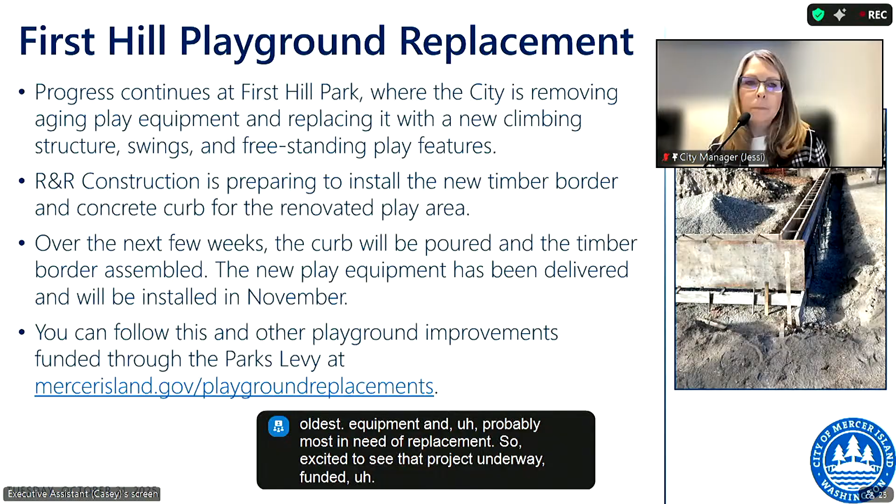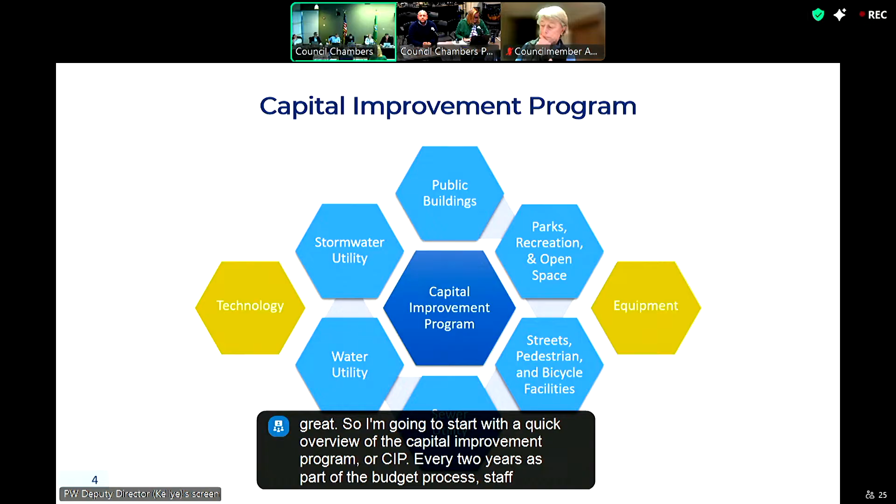Okay, great. I'm going to start with a quick overview of the Capital Improvement Program, our CIP. Every 2 years, as part of the budget process, staff develop a 6-year plan that lays out how we'll maintain, improve, and invest in public infrastructure, things like buildings, utilities, parks, streets, and technology. Each new CIP cycle begins in the spring of even-numbered years and concludes with the adoption of the biennial budget later that same year. It's a big, collaborative effort that helps us plan ahead and make smart, strategic investments across the city.

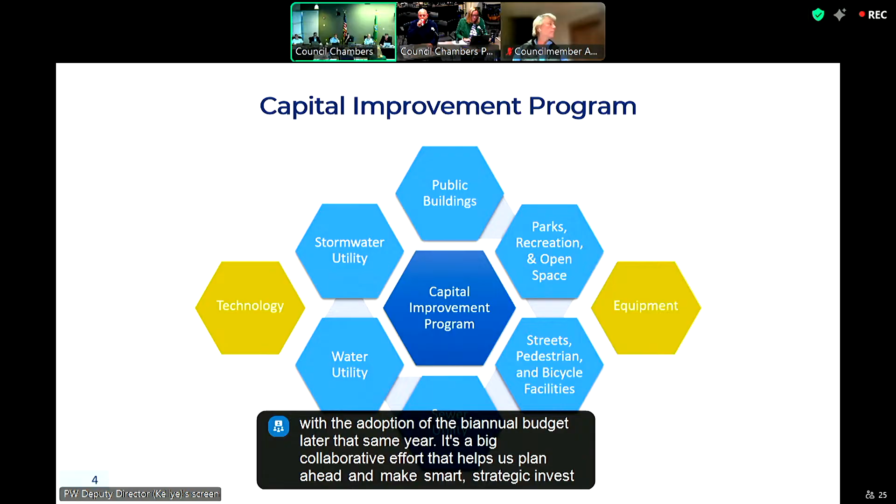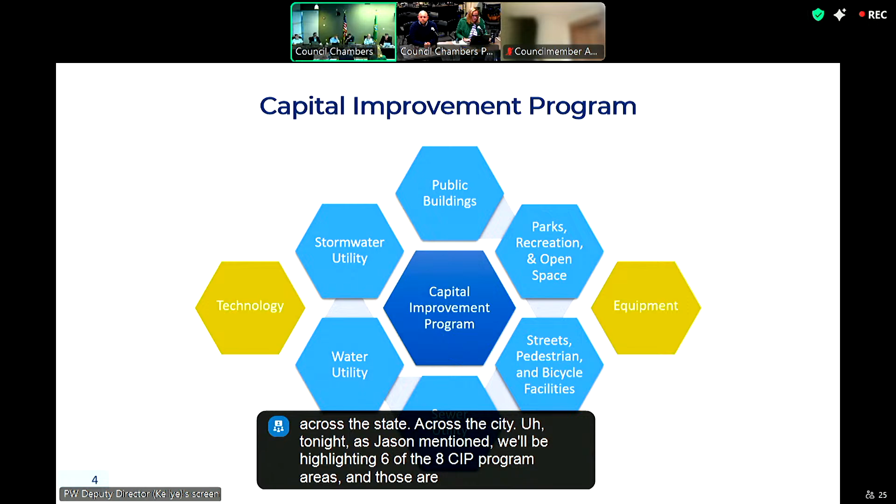Tonight, as Jason mentioned, we'll be highlighting 6 of the 8 CIP program areas, shown here in blue. For this biennium, the city CIP totals about $105.5 million. Most of that funding supports our public buildings, parks, streets, and utility programs, the areas where we continue to see the greatest community need in infrastructure investment.

Altogether, the 25-26 CIP includes 148 active projects. Of those, 137 are managed by the Public Works Department. Projects span all areas of city infrastructure, with the most in the water utility and parks, each with 29 projects. We also have 25 street projects, 20 public building projects, 18 in the sewer utility, and 16 in the stormwater utility. It's a substantial workload for our 20 staff members who manage everything from planning and design to construction and maintenance.

And finally, none of this happens without the team. We've got a talented group of engineers, landscape architects, project managers, inspectors, and management staff working behind the scenes to keep projects moving and on track. Their combined experience and collaboration are what makes it possible to deliver such a large and diverse program. Most of our team members are here tonight and available to answer any questions you might have on their specific projects. We really appreciate the opportunity to share their work and highlight the progress happening across the city with you and the community.

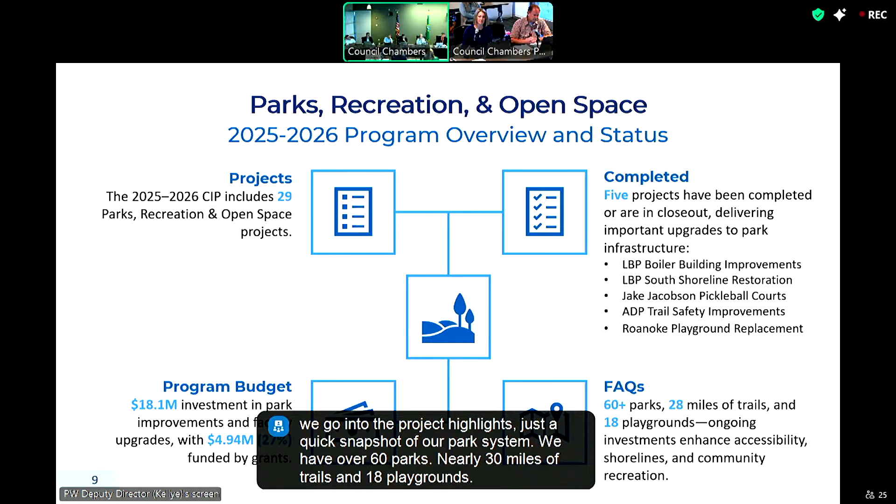Next slide, please. So kicking things off with our completed projects at Luther Burbank with the boiler building. Some of you joined us for a site tour last week where you saw key improvements including the seismic upgrades, chimney height reduction and stabilization, a new roof and chimney cap, and then renovations to our restroom and concession area. Construction wrapped up in early 2025 with final closeout underway and expected to wrap up by year end.

This project was supported by nearly $778,000 in Washington State grant funding. And these improvements actually set the stage for Phase 2, which will focus on activating the building for public use and providing a hub for community and recreation programming.

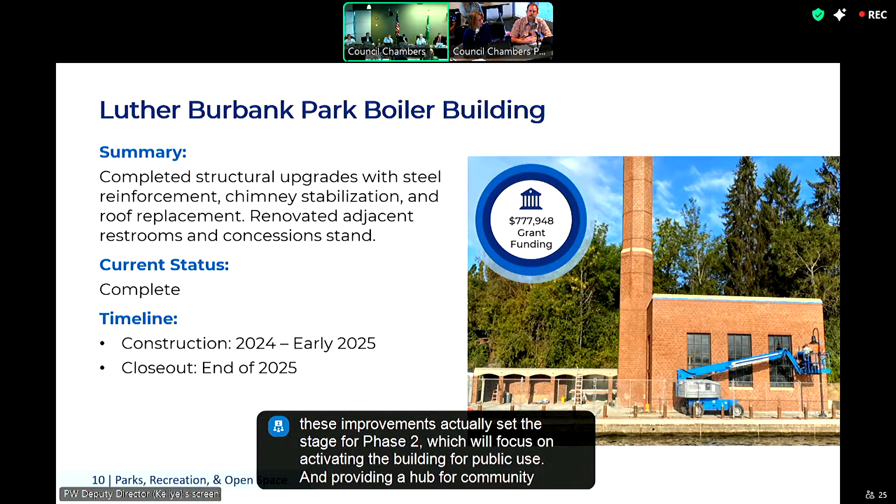Next slide, please. Now, the South Shoreline project focused on restoring and protecting the area between the docks and the swim beach, boosting aquatic habitat and stabilizing our shoreline at Luther. Key improvements included adding fish habitat gravel and the large woody debris, relocating and upgrading trails, removing invasive species, and planting native riparian vegetation. Construction wrapped up this summer, and final closeout is also underway and should be completed by year end.

A fun fact for the South Shoreline project is that the invasive plant removal and the shoreline planting was actually completed by volunteers and the Conservation Corps crews. This included 87 volunteers joining us across 3 events in 2023, showing that this is truly a community-driven restoration event. This project was also supported by $240,000 in grant funding from King County.

Next slide. And then to round out the 3 completed projects at Luther Burbank this year, the former tennis courts have been transformed into the Jake Jacobson pickleball courts, named in honor of Councilmember Jacobson's dedicated service to our community. This project replaced the aging 1970s tennis courts with 8 brand new pickleball courts, had new surfacing, striping, nets and fencing, accessibility and drainage improvements, and we restored the Summer in the Wetlands mural that you can see in the back of the image. Most construction took place in 2024 with final coatings applied this past June.

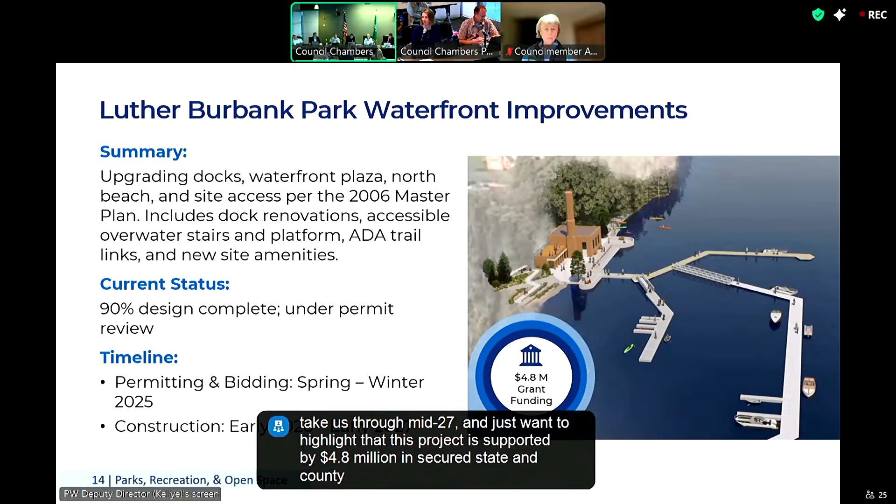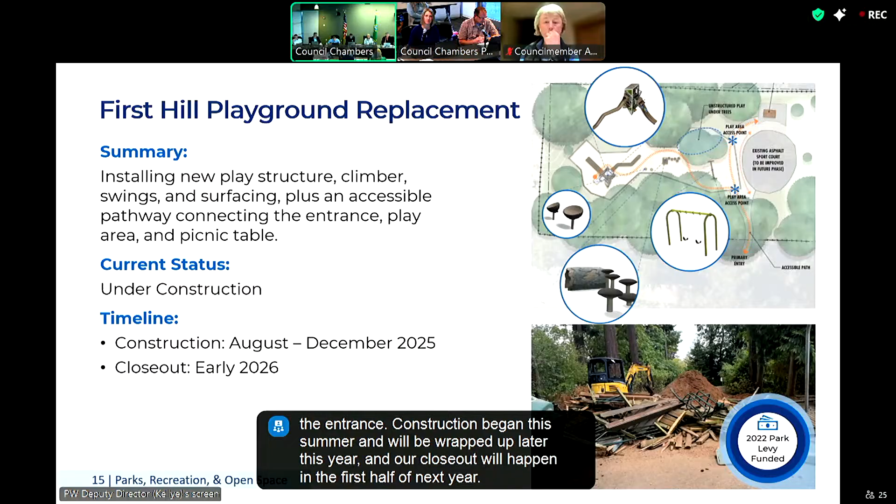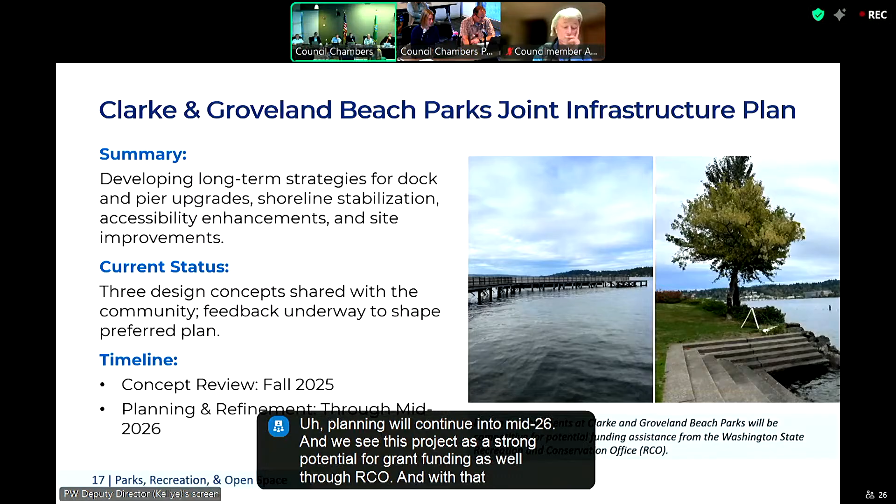Rounding out our active park projects is the joint infrastructure plan for Clarke and Groveland Beach Parks, laying the groundwork for improvements over the next 10 to 15 years. This effort focuses on upgrades from dock and shoreline improvements to accessibility enhancements and amenities like restrooms, signage, and parking. This is your chance to weigh in—we have 3 design concepts for each park available for input through November 3rd, which will help shape our preferred plan for each park. Planning will continue into mid-'26, and we see strong potential for grant funding through RCO as well. That wraps up our sampling of completed and active park projects, many of which have been made possible with support from state and county grants and our Parks Levy funds.

Any questions before I move into the public buildings?

Councilmember Reynolds: Quick one. You said, I think, that Roanoke was the first one done under the Parks Levy. I'm trying to remember—I believe we've got funding for 15 parks in 16 years or something like that.

It was roughly one a year. It's been 3 years now and we've got the first one. I'm assuming that's because there's a lot of planning you have to do once you start, but does that mean we might get more than one a year going forward occasionally, or what's the timing expected? Potentially—so you're spot on. We have completed the first project. If you recall, the Dean's Children's Park Playground was actually first on the original to-do list, but given its size, magnitude, and other elements, we swapped projects to allow for a larger public engagement process, which I think is beneficial to the community and the end project. So in terms of out-year projects, there's a potential where you could see two playgrounds completed in a year. We haven't penciled out exactly how that will fall or in which year, but it's a possibility down the road.

And if we get to the end of the Parks Levy but haven't finished, will we be able to carry over the money to do some in years 17 and 18? Seems like we could probably get back to you. I'm a little uncomfortable making that commitment—the money will be spent. In fact, one thing we didn't mention is that we cost-estimated based on 2021, 2022 dollars, and we've seen pretty high inflation, so I wouldn't want to characterize us as having money left over. Wishful thinking on my part, perhaps. Yeah, I'd say very wishful. But as Jason just mentioned, we had an order we anticipated, but we evaluated quickly and made some changes.

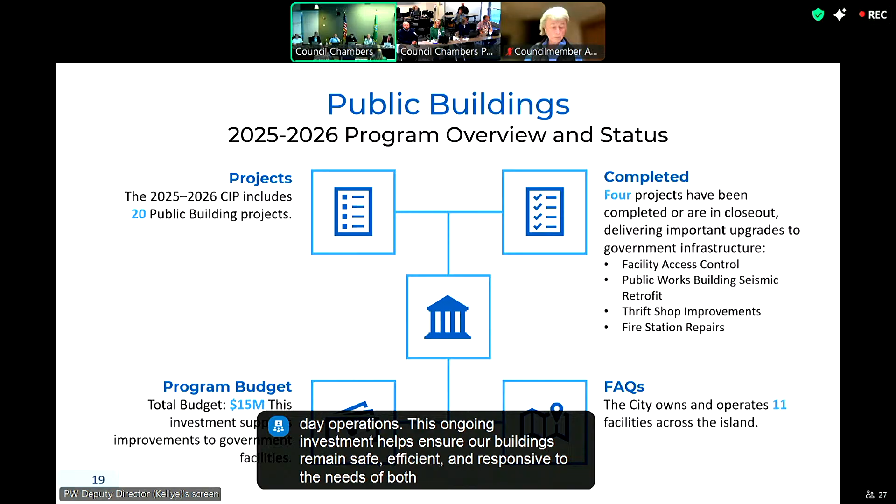Just a quick shout out to everybody that's listening in. This facility remained open for the duration of construction, and we really appreciate everyone's patience and flexibility while all of these important upgrades were happening.

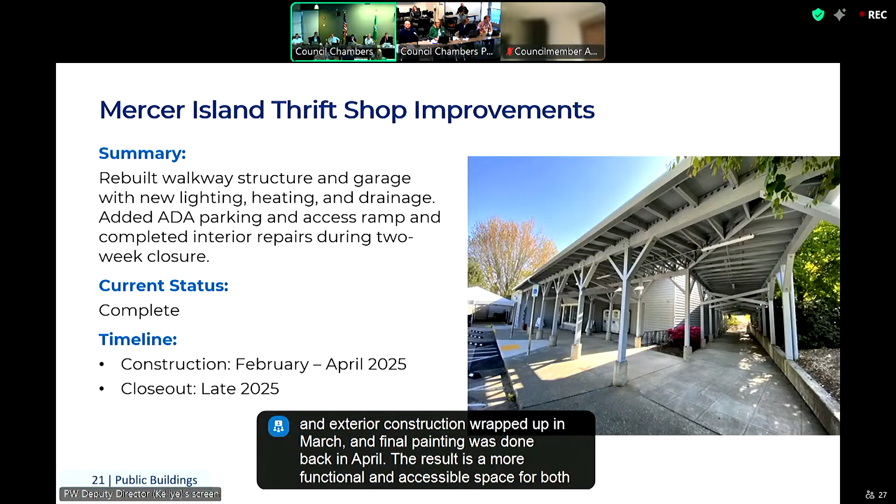Okay, we wrapped up this upgrade over the summer, and it marks a big step forward in how we manage facility security. Instead of relying on traditional keys, we now have a more efficient and secure system across 3 of our facilities: the community center, as well as the admin building and caretakers facility at Luther Burbank. It's not just about better access control, the centralized software and reporting tools also make day-to-day management more streamlined for our staff.

And now I'll shift gears from the completed projects to active work happening.

We began with a system assessment to identify the best path forward. That report is nearing completion and will include cost estimates and upgrade options that we'll bring back to council for consideration. Design and permitting are anticipated to begin in 2026, setting the stage for a much-needed system upgrade.

Actually, Shelby, can I cut in here? Council, I just want to go back—could you go back to the Public Works Maintenance Facility real quick? I just want to remind you the nature of the work at the Public Works building was to buy us about 5 to 7 years. It's really important to note that the building is at the end of its useful life. You're well aware that we have a bond measure on the ballot. We were possibly on the verge of needing to close part of this building due to a significant problem with the green roof. So I just wanted to remind you that the work here was the short-term repairs.

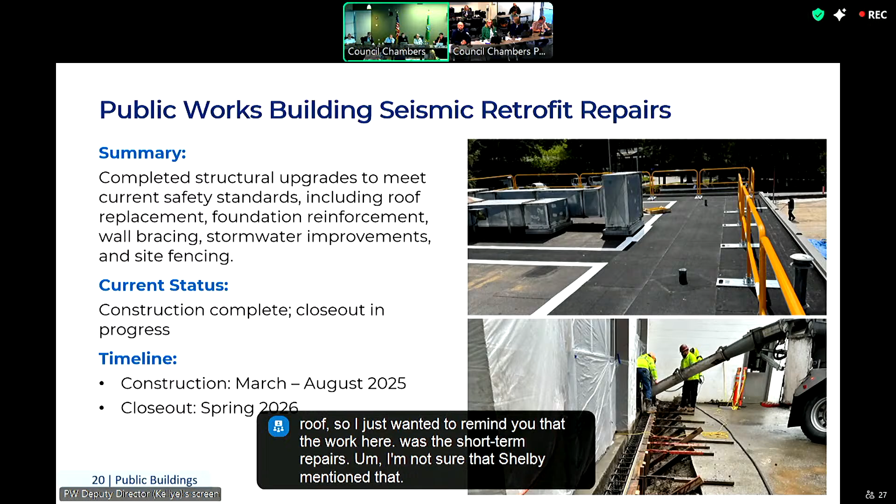I'm not sure that Shelby mentioned that. And then let's flip back to the 9655 building. When we acquired the 9655 building, we did our due diligence and identified a couple of deficiencies that were known to us prior to executing the sale. That included an HVAC system at the end of its useful life, the roof needing to be recoated, and elevator repairs. The interior is in good shape but needs carpet and paint. Those things are the minimal items we need to address to be able to occupy the building. That was part of our negotiation, as you are aware, but the community may not be aware that at the time of purchase, we negotiated a lower price to offset the work that would have to be done to occupy it. Very good, thank you.

Okay, not seeing any other questions.

Good evening, everybody. Moving on to streets, pedestrian and bicycle facilities. We have over 25 projects in this biennium that are either under construction, in planning, or will be in planning next year. Five of those have been completed. Our budget is over $12 million, with $2.2 million of that funded from Sound Transit settlement funds.

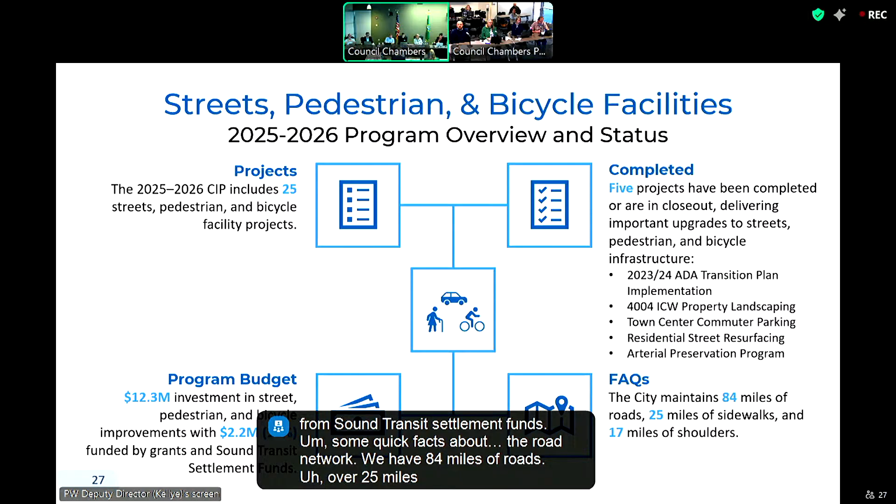Some quick facts about the road network: we have 84 miles of roads, over 25 miles of sidewalks, and 17 miles of paved shoulders. Next.

The first project we're highlighting is the town center parking facility. This was on the old Tully's Coffee property. Work involved removing that building and regrading the site, which created a 35-stall public parking lot with conduit for future electrical vehicle charging. It will have bike lockers. In fact, this week landscaping and bike lockers are getting installed. The lighting will be installed in November, and final project closeout for this will be probably early next year.

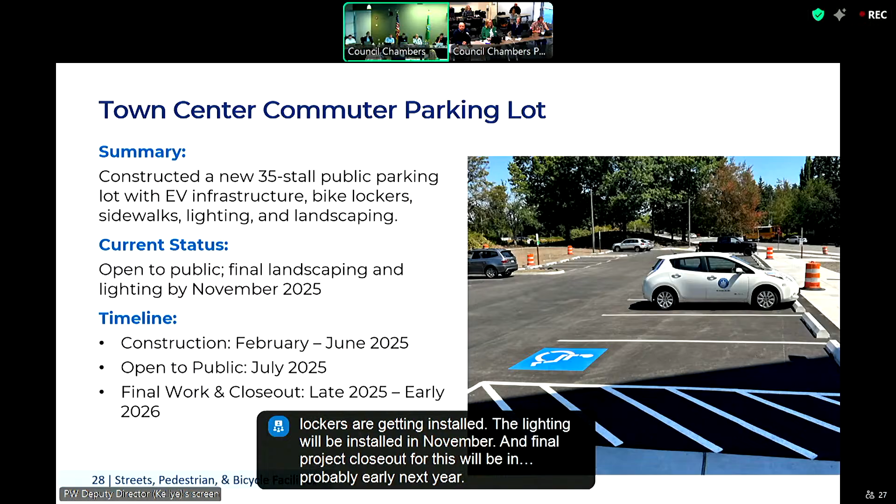We've done some work on Island Crest Way. In 23-24, we started some Island Crest Way corridor improvements. That project carried over into 2025 before it was completed. The project we're focusing on here was 3 crosswalk improvements in the Island Crest corridor between 53rd and 68th.

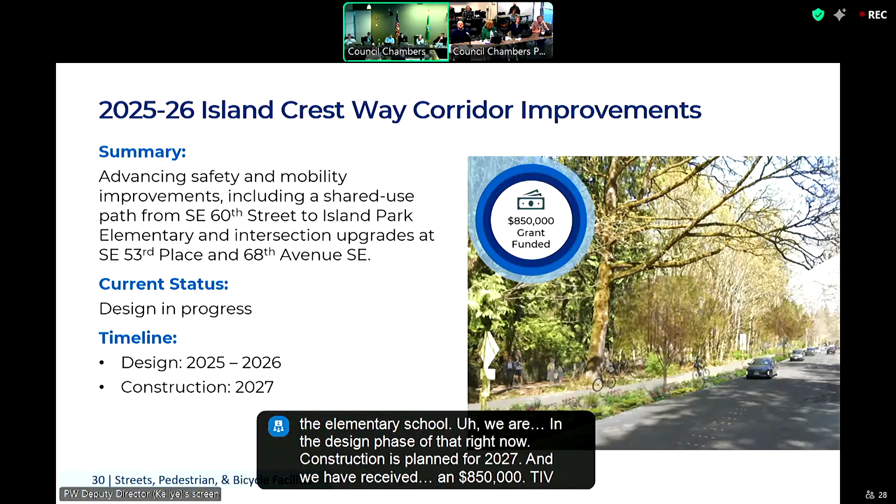We are in the design phase of that right now. Construction is planned for 2027, and we have received an $850,000 TIB grant for that project.

Congratulations. Good grief. Next slide.

You probably saw this project in the town center over the last year. This is the 80th Avenue pedestrian improvements. This project replaced sidewalks that were built in the 1970s and 1980s. These had a lot of damage from the nearby street trees. They were narrow, they weren't ADA compliant. So this project replaced sidewalks from Southeast 32nd all the way up to Southeast 27th.

Added new pedestrian landings, a new street lighting system to replace the one from the 1970s, and it also replaced numerous street trees along that corridor. This project finished earlier this year. Closeout's probably coming to you early next year.

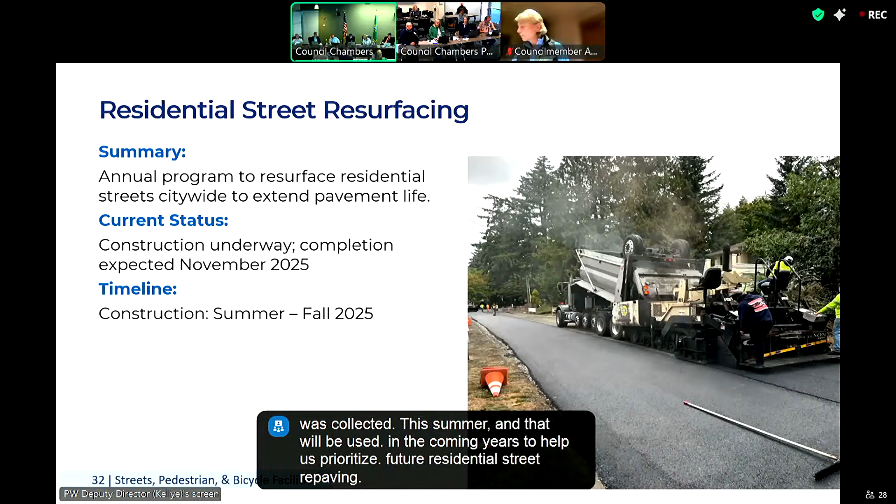Any questions on streets, Councilmember Reynolds? I needed a memory refresher again. You said 58 miles of residential streets, and we do about a mile a year. I thought I remember being told before that pavement typically lasted about 30 years. Is that correct? If it is, it seems like we're behind schedule. Can you comment?

I think we're repaving them at about the right rate. I said at least a mile a year. Some years we're getting a mile, others we're getting a mile and a half or two. When I look back on the last 10 years of mileage that we have paved, we're at about par with that 30-year lifespan.

So it hasn't been a deliberate slowdown due to budget constraints, it's just kind of natural ebb and flow? Correct. Some years the streets are wider, so we don't cover as much length. Other years, we get into a neighborhood where the streets are smaller and narrower, and we can cover a greater distance. Again, I look back at kind of a sliding 10-year average, and we're kind of at par with where we should be.

And is 30 years about the right estimate? Am I remembering correctly on that? We have some streets that have lasted longer than that. And what share of the residential streets are chip seal instead of asphalt? Oh, that's a tough question. Because those last about half or 2/3 as long, is that right?

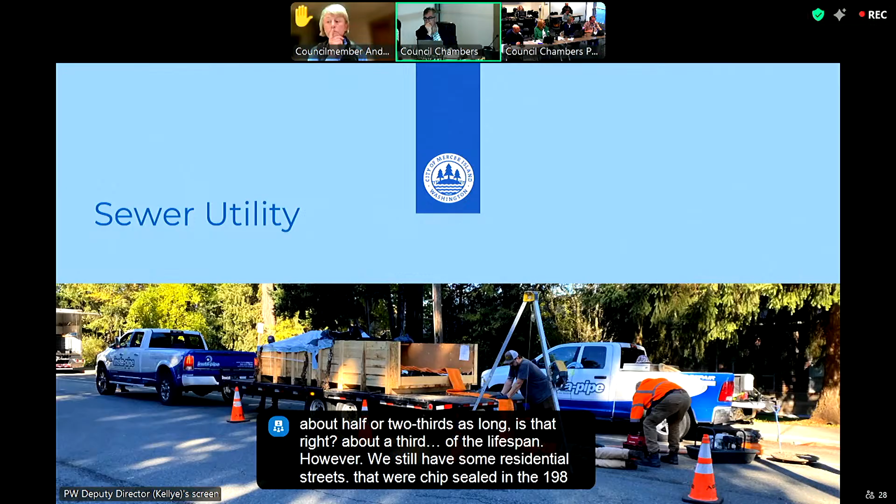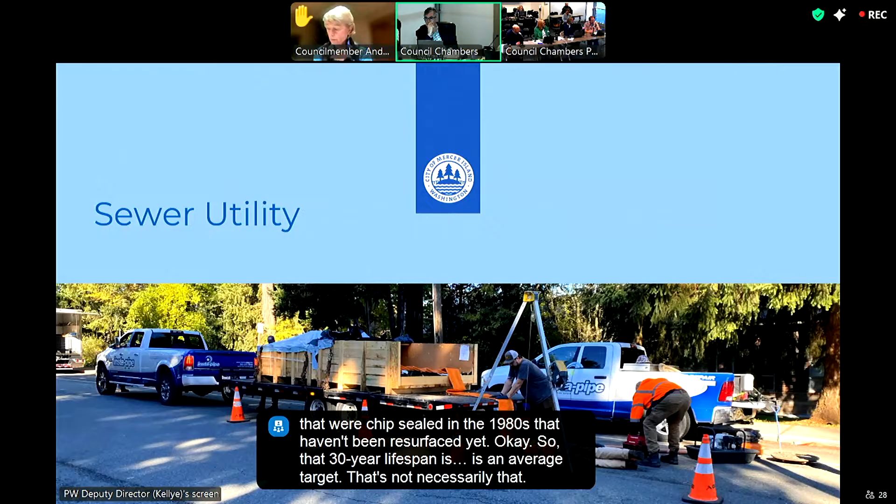About a third of the lifespan. However, we still have some residential streets that were chip sealed in the 1980s that haven't been resurfaced yet. So that 30-year lifespan is an average target. That's not necessarily that at year 30 we come back and repave it. Right, as those streets get into their...

25-year, 30-year mark, that's when we're watching them on that pavement condition index program where we collect the data every 3 years. We're starting to see those age, their condition score starts to drop off. Those are the ones that we get into the 6-year TIP program for paving.

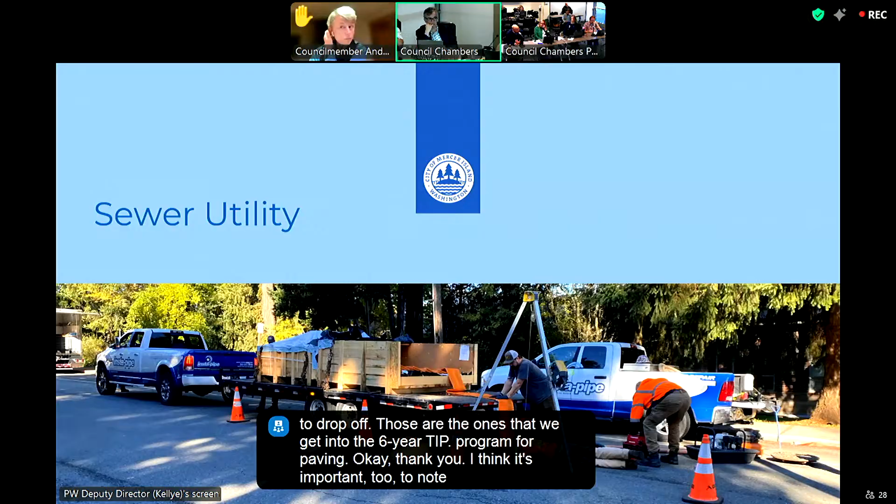Okay, thank you. I think it's important too to note, so the data is driving a lot of the decision making. So we're recollecting data every 3 years, but we're also coordinating with our other utility projects, not only city projects, but the water projects in particular, the supply line we're going to talk about later. There's a number of street projects that were originally planned for replacement earlier, but we've slid those back to be completed after the water project, so we're not paving a road, digging it up, and then repaving it again.

Not only our own capital projects, but also coordination with other regional partners, right? You see construction trucks around the island right now. Those aren't city trucks a lot of times. Those are partner contracted projects that are out there. So we are trying to schedule that work accordingly with not only our projects, but also other impactful projects as well, so it could slide that scale a little bit because of that.

Thank you, Councilmember Weicker. Can we take a minute then, Jason, to talk about all this grant funding that's coming through from your team? Because this $850,000 is quite notable, and that just doesn't happen on accident or by magic. Can you talk a little bit about how awesome your team is for bringing in this money to help us make our budget go further?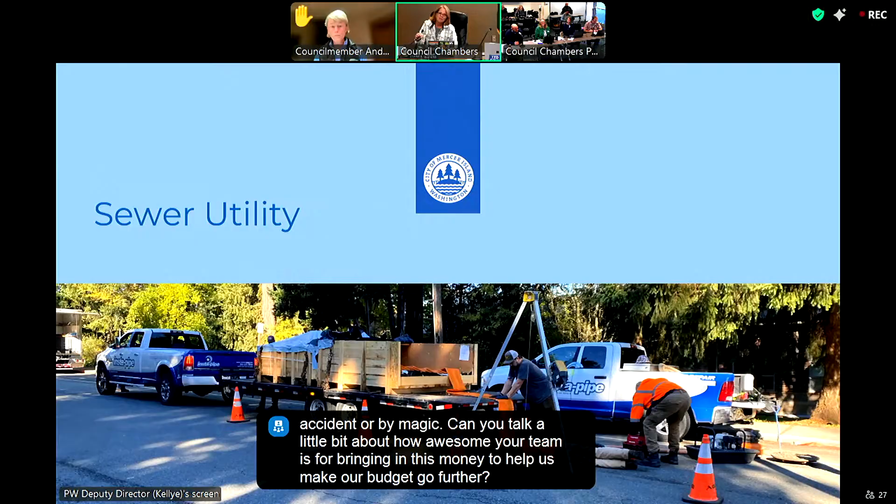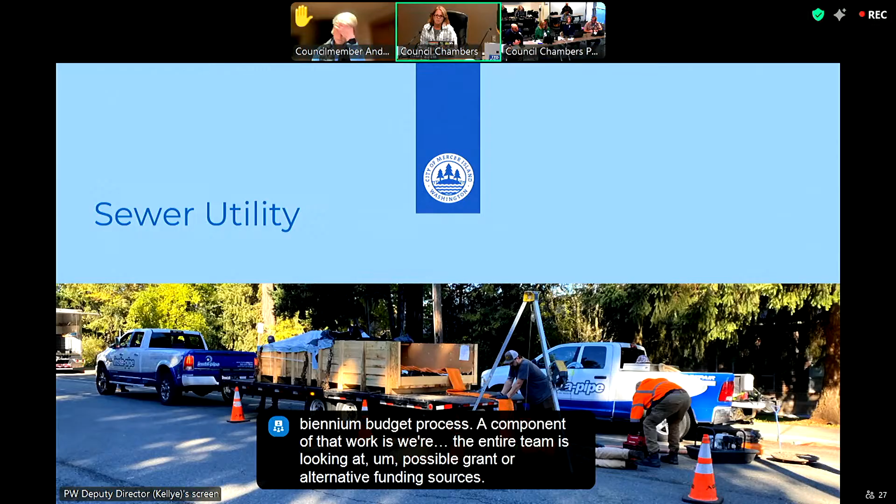Yeah, absolutely. So as a component, you see the TIP every year, we're doing the 6-year CIP every 2 years with the biennial budget process. A component of that work is where the entire team is looking at possible grant or alternative funding sources, trying to stretch our dollars further. Our team has done a remarkable job of securing those grants in the recent history. They continue to prioritize that work where possible.

Not every grant is perfect, right? So there are certain opportunities that we pass on because it doesn't fit what we're doing or need, but certainly we are looking, that's an active part of our work that we do, is we're trying to find those alternative outside funding sources where possible.

And if I can add to that, when it comes to parks, we really look at the RCO and what grants are available. That's on a 2-year cycle, even years as well. And we actually look at our project schedules and deliverables to make sure we can get deliverables like grants, cost estimates, community support, everything that is required for that grant to time that in, the first quarter of the even year, so we can start preparing for those presentations.

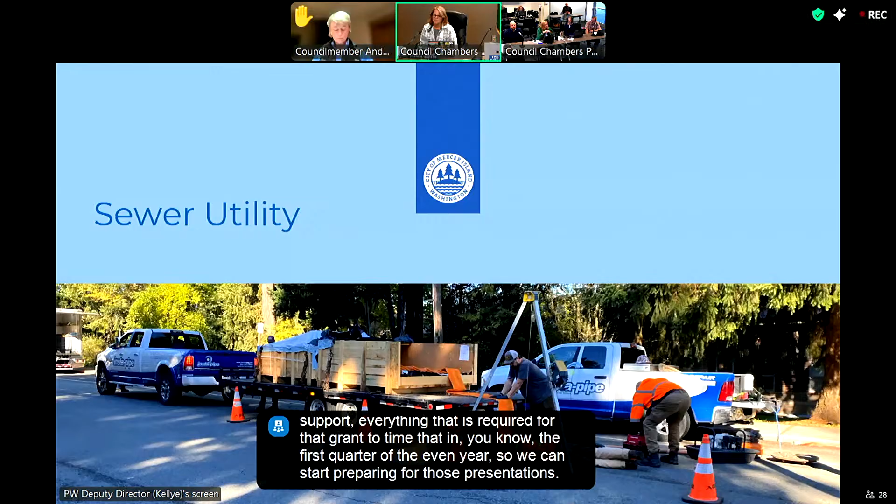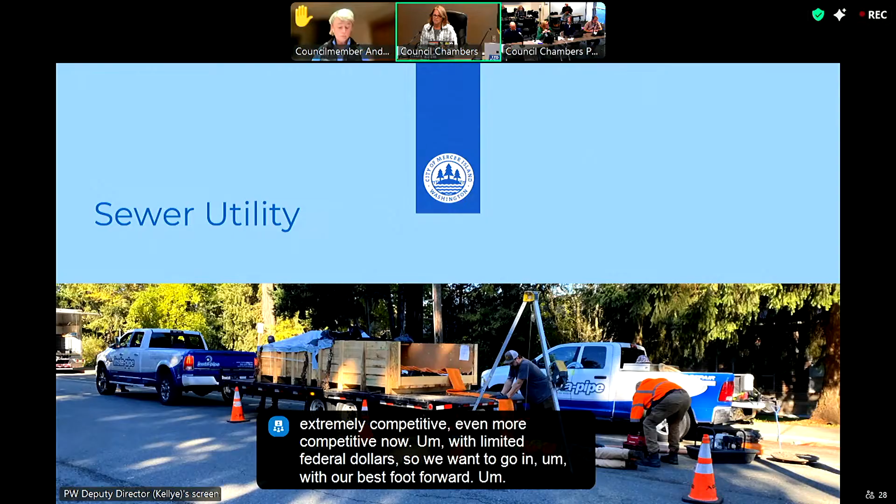RCO grants are extremely competitive, even more competitive now with limited federal dollars. So we want to go in with our best foot forward with the projects that make sense. So Clarke and Groveland, as well as Deane's, are two that we are planning on applying for next year.

And those, one of the conditions of the RCOs was the PROS plan and the ADA, I think I remember. Yep, so that is correct, we did our part too. Yeah, anything else?

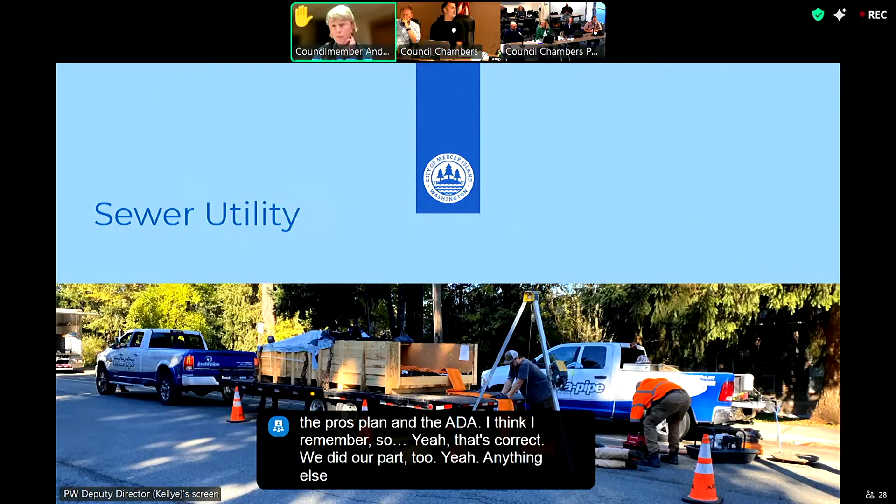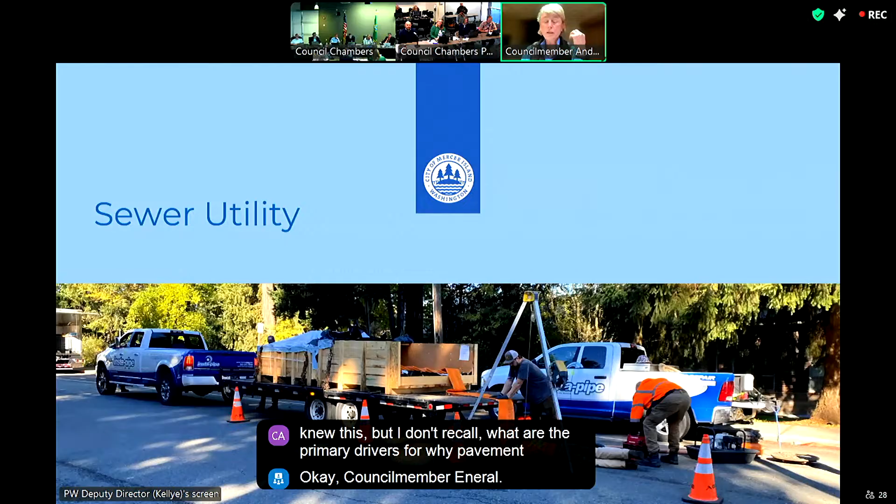Yeah, I had a question. Okay, Councilmember Anderl. Thanks. Back to the street repaving, can you just tell me, and maybe I knew this, but I don't recall, what are the primary drivers for why pavement ages? I mean, is it just traffic, or does weather have a component? Are there other components that I'm just curious to kind of understand?

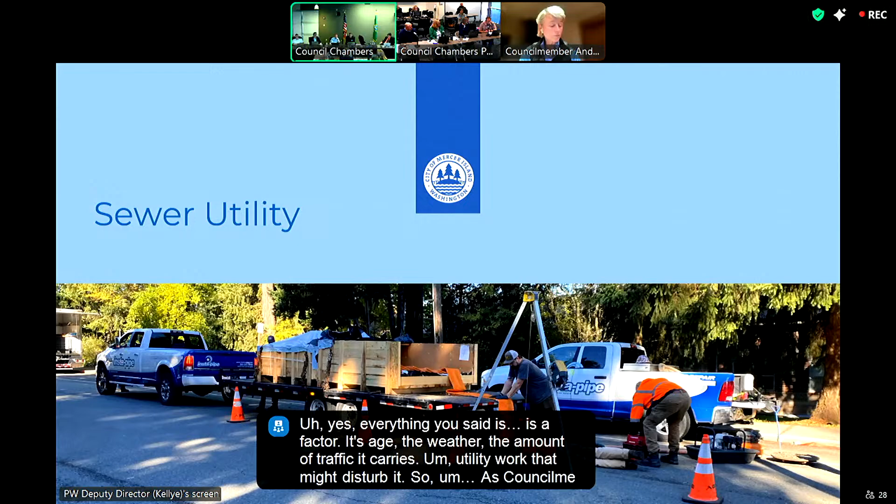Yes, everything you said is a factor: its age, the weather, the amount of traffic it carries, utility work that might disturb it. So, as Councilmember Reynolds said, we've stated before that residential streets last about 30 years. That's the typical lifespan. The arterials on the island last a little bit less, 20 to 25 years. That's because they carry a lot more heavy loads.

More trucks. Right, and the asphalt lasts longer, but it's more expensive, and the chip seal can be redone for less money, and so you guys balance all that. Correct. You have to have a pretty good road structure to put a chip seal on it, because the chip seal doesn't really give you a lot of structural load carrying capacity.

So sometimes a chip seal is a good alternative, sometimes a hot mix overlay is a good alternative.

Moving on to the sewer utility, we have 18 projects in the 25-26 CIP, totaling over $12 million. We have 13 projects currently either in development or under construction. The sewer system on Mercer Island is somewhat unique in that we have not only over 100 miles of sewer mains, we have a series of 17 pump stations and 13 miles of sewer line that runs around the perimeter of the lake. There aren't many communities that have lake-line sewers.

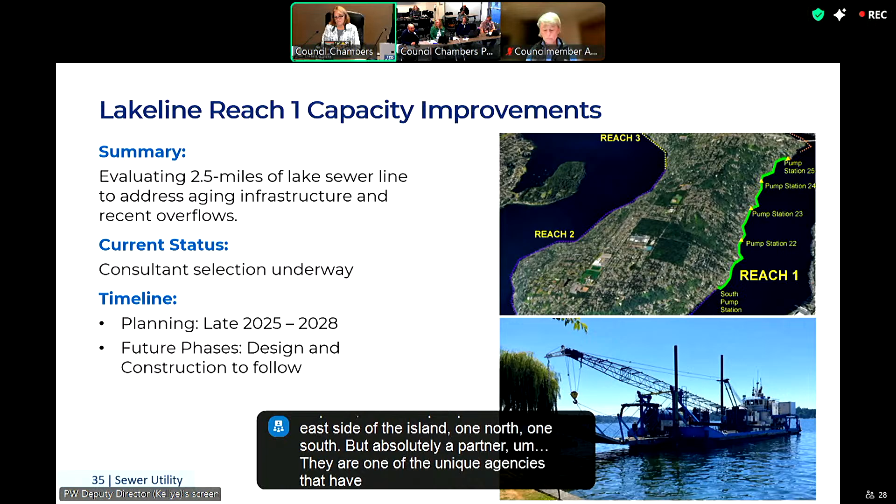They are one of the unique agencies that have a lake line, right? It's a different type of lake line than we have, but nonetheless a lake line.

Okay, moving on. Next slide. Which slide were we on? We need to be on the sewer plan. Oh okay, there we go, sorry about that. General sewer plan and hydraulic model.

This is a project to update our long-term sewer plan. For the first time, we're going to do a hydraulic model of the island's sewer system to see what sort of flows we have and what sort of capacity we have. It's been many decades since the system was designed, and the flows are certainly different today than they were in the 1960s when that lake line was designed.

So we're currently underway developing the scope of that project. The planning is going to happen late this year, early next year, and probably run into 2028. Future phases are going to depend on what that study finds.

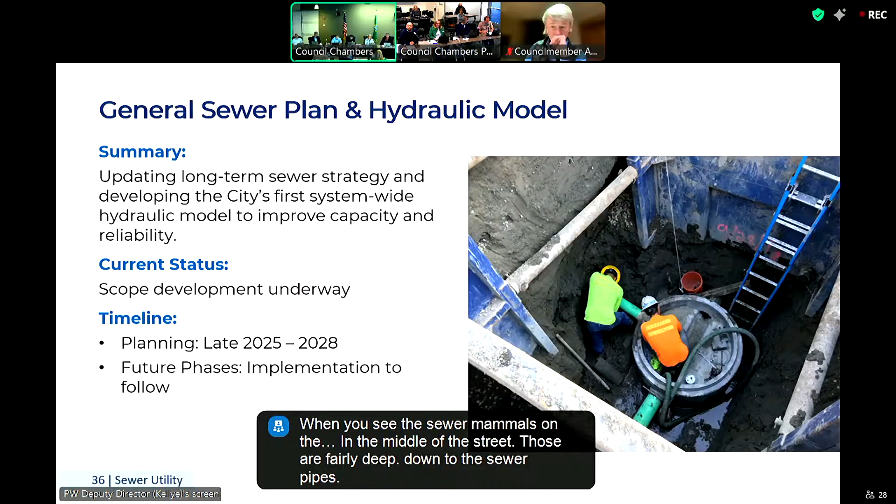Next slide. The SCADA equipment replacement is an important upgrade to our sewer system. This stands for supervisory control and data acquisition - I even had to write it down to remember it. This is a computer system that controls the pump stations, that regulates how these different sewer pump stations operate and push that sewage down to the south end of the island, or to the north end.

This involved installing monitoring and control systems in 17 sewer pump stations. We have 1 pump station left to do, that's pump station 11. The reason that pump station is lagging behind the others is that station is getting rebuilt as part of the King County North Mercer Enatai force main project that is under construction right now.

I believe they recently completed testing on the pump station 11 operations, but it's going to be a couple of months until the SCADA equipment gets installed in that pump station. As you can see in this picture, access to our pump stations - not only is the lake line difficult, but some of our pump stations are difficult to get to. Here I think they had to hand carry a lot of this stuff through a yard to get it to the pump station.

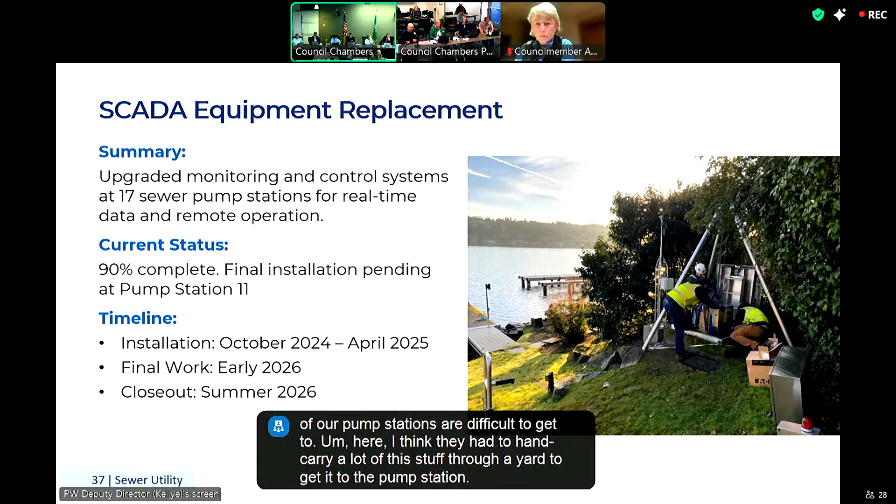Next slide. Pump Station 20, this is at the south end of the island. This is going to be our first of multiple sewer pump stations that are going to get modernized and upgraded with likely new pumps, new electrical components, probably refitting the wet wells, because as with our lake line that was built in the 1960s, these pump stations date to the 1960s as well.

A couple of years ago, we did a condition assessment of the different pump stations. Pump station 20 rose to the top of the list as the one that needed work the most. That design is about 90% complete. We hope to move to construction on that project in 2026.

This is a picture, I believe in pump station 20, but this is typical of most of our pump stations. This is probably 15 to 20 feet below grade. You can see these guys are standing next to three pumps. The 3 motors are up above their head, the pumps are a little bit lower. You can see 3 valves.

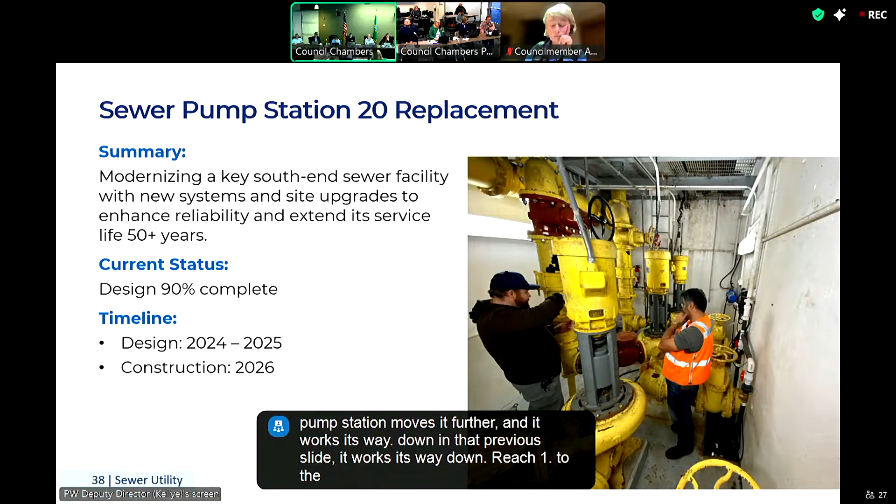That was the end of sewer. Did we have any other comments on that? Councilmember Reynolds: Just curious, I think I'm realizing I should have been a civil engineer, because this stuff is pretty cool, although I have no qualifications for it.

The pumps that are there, it looked like there were three in that room, is that correct? Correct. Are you saying only one runs at a time? Correct. And if that one can't pump the wet well down fast enough, a second one will come online and join in pumping. I think it's pretty rare that the third one comes on, but in any given week, all three of those pumps run. They trade off on which one is running in the primary position, which one is the backup, and which one's resting.

And are they alarmed or monitored somehow? So if one fails, will you know? Yes, that is what the SCADA system does for us. It monitors all of that. If a pump fails to start, it will send an alarm to the maintenance shop and to whoever is on call, and they can respond to those alarms remotely.

So if things work as they should, we'll never have a situation where something fails and we don't know, and sewage starts backing up into people's homes, right? Ideally, the SCADA system tells us what's happening, and our guys are able to react in real time and minimize whatever that emergency or alarm is. Okay, thank you, very good.

Councilmember Anderl: Yeah, so I think I heard this correctly, that there are 17 sewer pump stations, but I'm hearing numbers designating the pump stations that go above 17. Have there been consolidations over the years, or how does that work? Good question. There are 17 pump stations. The numbering, years ago, there used to be more pump stations or flush stations around the island. They've been consolidated or modified over the years, so in terms of conveying sewage around the island, there are 17 active pump stations now. The terminology around pump stations versus flush stations has changed over the years in the sewer industry, so the numbering is based off an old model, but we do have 17 pump stations that convey sewage around the island. Okay, thanks.

So moving on to stormwater. There are 16 stormwater projects in the biennium, totaling about $4.2 million. We've completed one project, and have several others under design. Some of those under design are also in the permitting stage. We manage about 88 miles of storm pipes, 16 miles of ditches, and as you can see, there are over 5,500 catch basins.

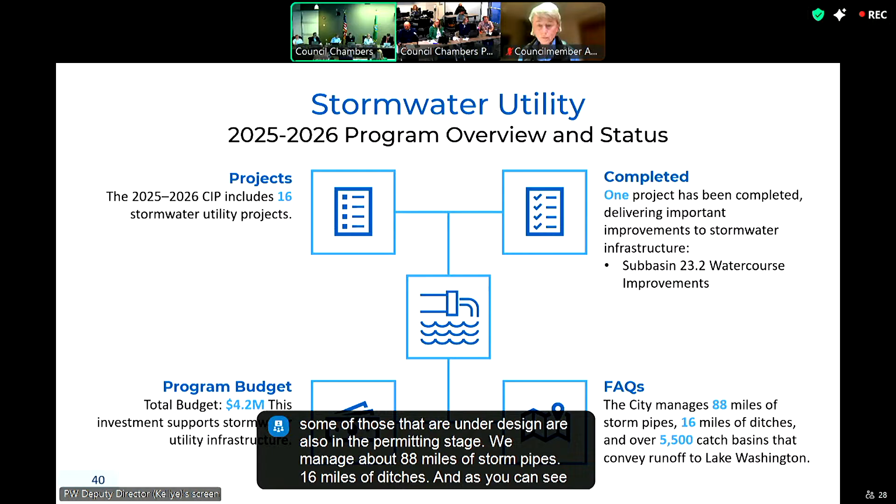The storm project we've recently completed is Subbasin 23.2, in about the 4,300 block of West Mercer Way. This project stabilized 300 feet of open water course that had been deeply incised — a very deep, narrow channel that had eroded — and this was restored with natural materials, logs, and large rocks, to fill it in and bring the flow line of that channel up out of the depth it eroded to. The area will also be replanted, and I think that replanting is scheduled for October and November. Next slide.

These two projects are under design, Basin 22 and 25. They're similar to the one we just completed — about 350 feet of eroded water course that we're going to restore and stabilize. This picture shows what happens in a rainstorm in these water courses: the flows come up and it gets erosive, and those channels get a little deeper with every winter. We're hoping to get these projects into construction in 2026. We're awaiting permitting from Fish and Wildlife. Next slide.

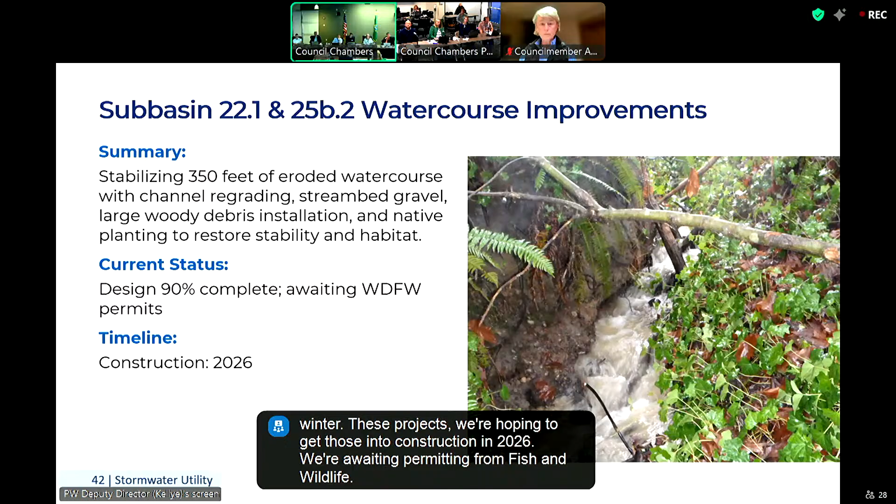The street-related stormwater drainage improvements program is geared to making minor improvements in a neighborhood, primarily ahead of roadway paving. If we're going to repave a neighborhood, that's a great time to install pipes that might require cutting the street. So this year we did a couple of minor improvements on 66th Avenue and 71st Avenue up on First Hill, in advance of repaving those streets back in July.

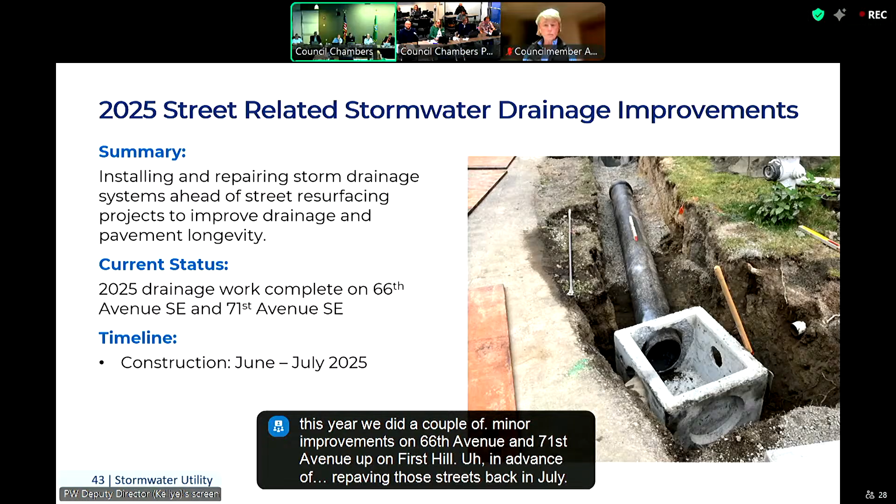Next slide. So storm was kind of short. Any questions on that one?

No takers there. Okay, so we'll move on to water, and this is a long one because we have the most projects of these categories happening in the water system. We're making a large investment.

We have 29 projects, over $38 million. We've received $1.2 million from the state capital budget to go towards the water supply pipeline. We've completed 6 of these projects, and we have a lot of miles of water main, 120 miles.

We have over 7,000 water meters. We have 2 reservoir tanks, 2 pump stations, over 80 PRVs. We'll touch on some of these as we go through. Next slide.

North and south reservoir tank improvements. This project has been going on for almost 4 years. I think the budget on this is $7 to $8 million. This project recoated the interior and exterior of both tanks.

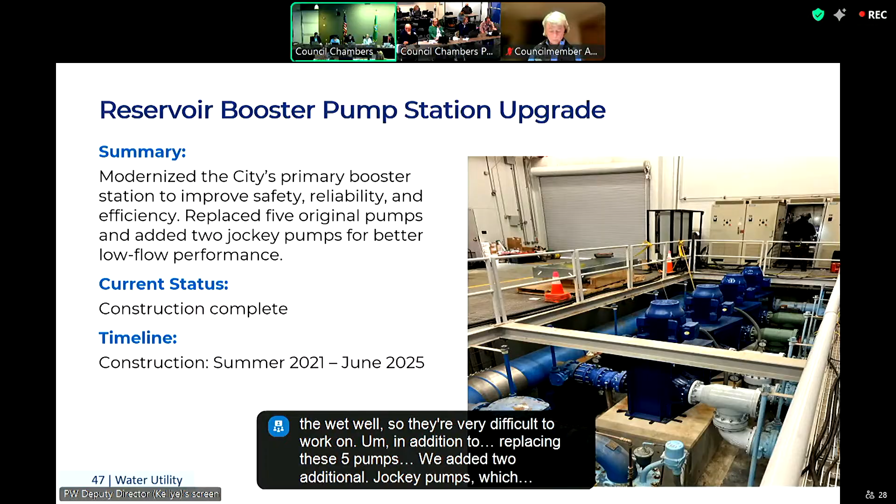In addition to replacing these 5 pumps, we added 2 additional jockey pumps. Kellye, if you go back a couple of slides to the title slide, you can see the jockey pumps. Go back one more—there you go. So these are the 2 new jockey pumps. You can see the black motors are above them. These sit above ground inside the booster pump building.

During low flows or low demand, these 2 pumps are boosting the pressure at the reservoir. When we get into a high demand period, one of the larger pumps will kick on, and maybe a second large pump will kick on. By installing these 2 little jockey pumps, as they've been named, this is much more efficient. It uses less energy, and they can keep up with low demand much more efficiently than running those large ones.

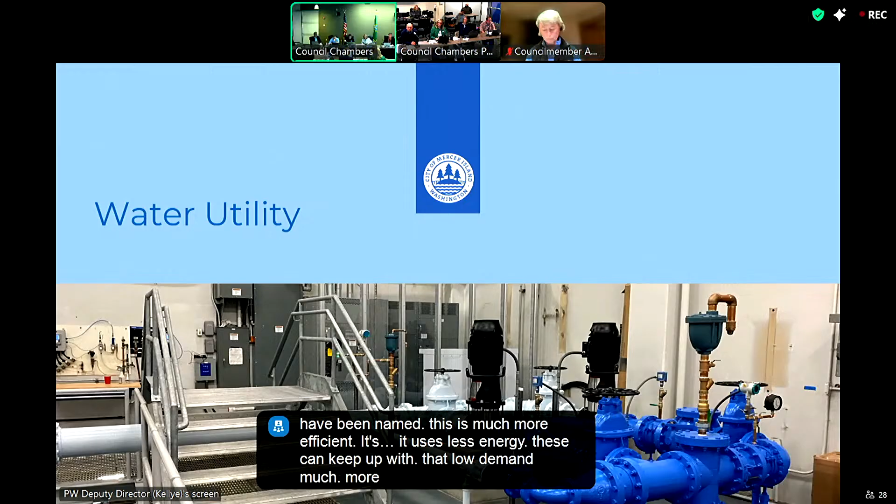Another project we recently did was replacing the emergency standby generator at the reservoir. The old 1975 generator was actually inside the building. It occupied the space where those jockey pumps are that we just talked about in that previous photo. So we couldn't do the jockey pump installation until we got this generator online, so that then we could remove the old one out of the building.

Along with replacing the generator itself, all of the conduit and wiring from this into the building is new. All of the circuitry in the building is new, all the transfer switches. So the reservoir building has not only a new generator, but essentially all new electrical circuitry inside. This was completed earlier this spring, and you'll probably see a closeout agenda bill for this coming next spring.

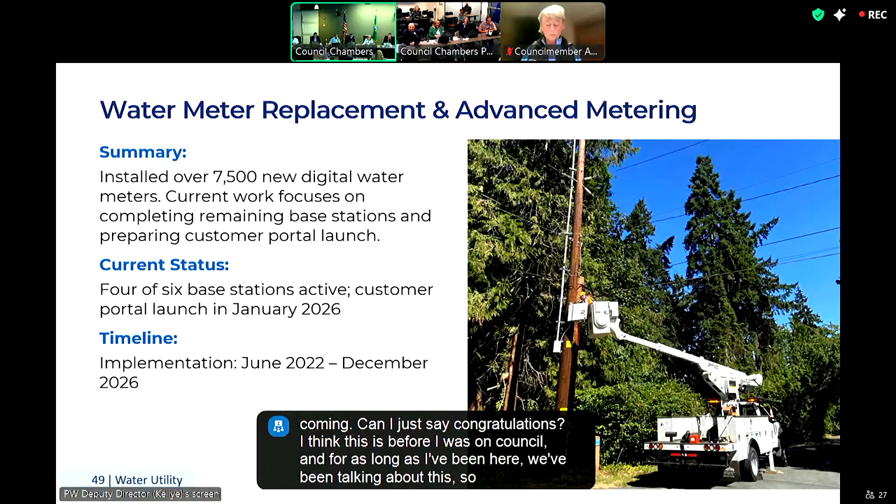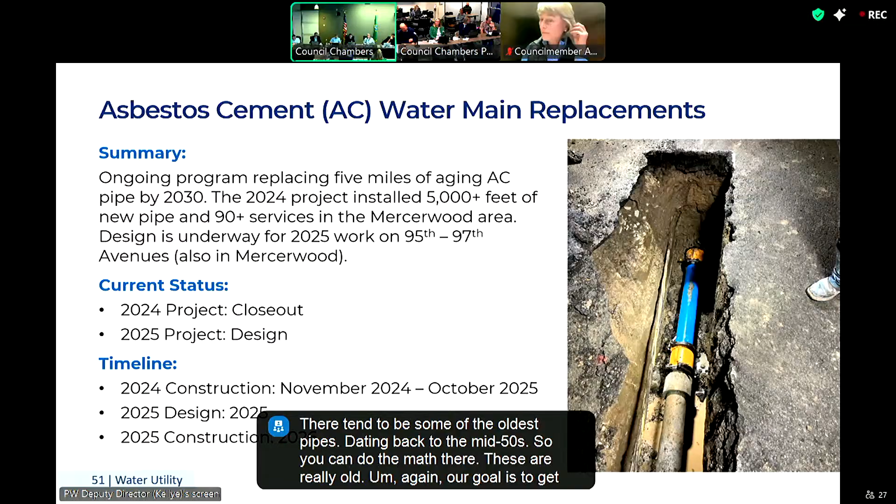Our water system has a network of pressure-reducing valve stations. Because we have a lot of elevation change from where the reservoirs are down to the homes at the lake, our water system goes through a series of pressure zones. These PRV stations help step down that pressure.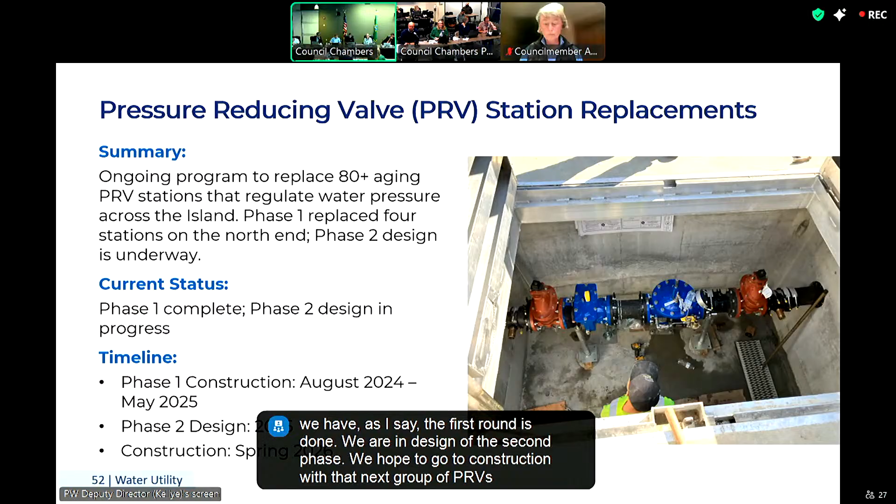Our goal is to get that design complete by spring of '26. We want to start construction on that in the spring of '26. It's probably going to be about 12 months of water work, and then after that, we're going to do probably 8 months of road improvements of Southeast 36th and Gallagher and Southeast 40th.

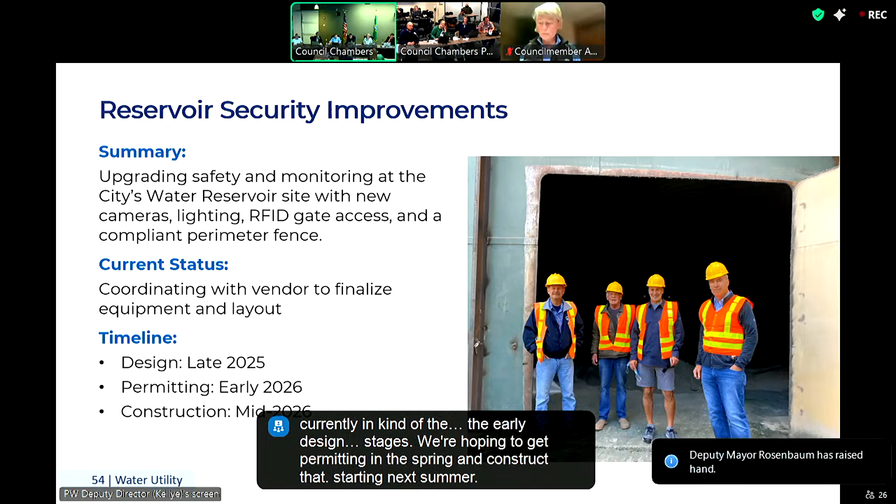This is the last project, by the way: water system plans. We are required to update our water system plan every 10 years, and those are due next summer. So we've begun work on updating the city's water system plan. There's also a risk and resilience assessment and an emergency response plan. Those are underway with an engineering consultant, and we should be able to meet that June deadline for those plans.

Any questions on the water projects? Deputy Mayor Rosenbaum: Yeah, Clint, on the fencing, you said it is to be compliant with what?

I don't have an answer for that. Department of Health comes out and does an audit of our water system, our infrastructure. So it's a Department of Health requirement.

As part of their audit, they provide some recommendations on improvements. I made a note here based off the public comment tonight. That didn't come up in our last DOH review in terms of protecting the reservoir, or the generator, excuse me, or the fuel tank. That doesn't mean it's not something we should look at in the future.

Short-term, I'll take care of this: we have an arborist who works for our parks and right-of-way team, and he's fully educated and certified to do tree risk assessments, so we'll make sure those trees around the reservoir are assessed and monitored in the meantime. We'll follow up with DOH in terms of the requirements for any further protection needed for that generator and fuel tank.

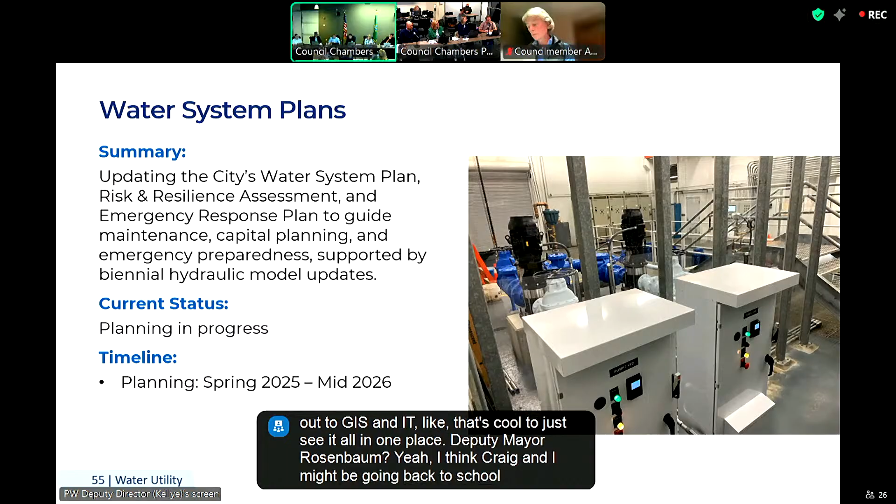Deputy Mayor Rosenbaum: Yeah, I think Craig and I might be going back to school for a civil engineering degree. I think this stuff is really interesting, but there's a tremendous amount of complexity that goes into these projects, and I think the team deserves a lot of credit for just keeping all these things on track. A lot of these things you don't hear about and don't think about until something goes wrong, and we certainly had a fair share of water challenges. But I just want to say thanks—it's incredible, it's great to see all this come together and how you coordinate everything.

Okay, thank you. So that gets us, probably the same team. Our last item, regular business, is AB 6795, which is the water supply pipeline project update. So Kellye's going to pull up the presentation.

I'll go quickly, this is an update. We're not going to pass it back and forth, you're just going to hear me go through it. So maybe that's good, maybe that's bad. Important project in front of us. That's our supply pipeline project update.

So just a refresher in case you need any memory jolts: remember, we had 2 water emergencies. The last one was where we actually had a leak on the SPU supply line over on Southeast 40th.

Kellye, if you can go ahead and skip to that map. Sorry, there's the agenda, we'll just go through it real quick. The next line—so this is the current supply pathway from SPU. As you see on the map, you've seen this map before: the pink is the SPU-owned pipe, the blue is the city-owned pipe. That was that emergency bypass, the 16-inch line that we actually ran water to the reservoir through.

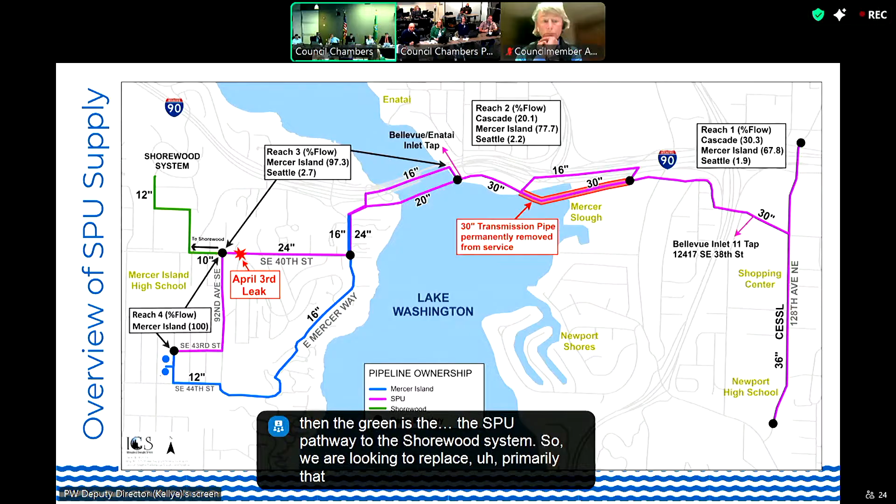And the green is the SPU pathway to the Shorewood system. So we are looking to replace primarily that section, that 24-inch pipe on Southeast 40th with a new alignment. So with that, Kellye, next slide.

Again, the goals of the project: new ownership and control with the city's responsibility. This is a generational investment that's going to improve our resiliency and reliability. It's going to reduce those risks in those vulnerable areas I talked about. As Clint mentioned earlier, the water main is going to be the first body of work, and then there's going to be a number of bike, ped, and transportation improvements that take place after the fact.

We are going to take over ownership of some of the existing SPU reaches. Reach 4 will be transferred to city ownership. Reach 3, which is currently the Shorewood reach, will also be a city transferred asset. That will be transferred to the city, and then we will provide a new pathway for Shorewood to receive water from the city off our existing distribution system.

And all along the way, we've talked about AC pipe a number of times. Clint talked about it tonight. We're actually going to be replacing some of the AC pipe as part of this project in a couple different segments. So all good stuff. As you can see here in this map, that green line following Gallagher, Southeast 36 and Gallagher, is the new proposed alignment. Next slide.

I just referenced the new service to Shorewood. So Shorewood used to be serviced directly from SPU. The design team has worked out 2 new connection points. Again, this is off the city's distribution system, so Shorewood will become a customer of the city when this is all said and done. And then we're actually going to eliminate a segment of AC pipe along the way as part of that process.

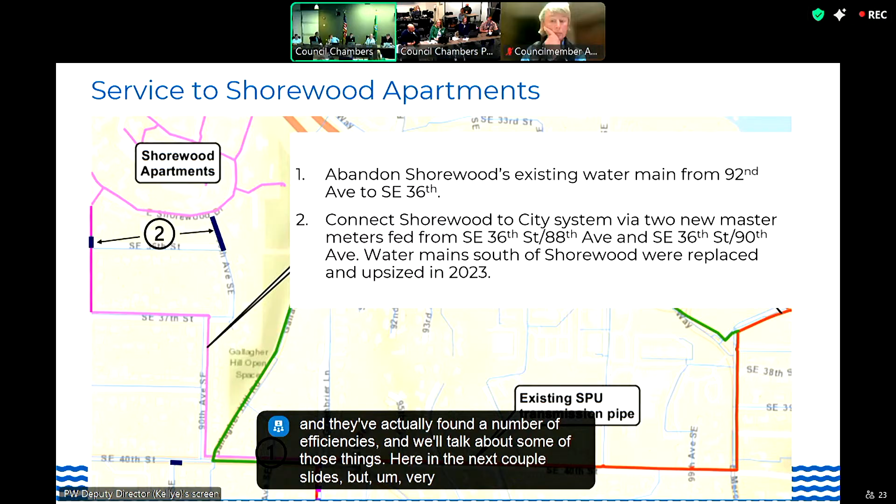I'll also take a moment to remind the council that we are using a construction alternative process in this project where we actually brought the design team on early, and then we have the contractor, Scarsella Construction, at the design table with our project team and engineering team going through the rest of the design. They've found a number of efficiencies, and we'll talk about some of those in the next couple slides, but it's very advantageous to the city to get them at the table early on to help work through a complicated project. Next slide.

So the water elements: again, we're going to install over 5,000 lineal feet of new 24-inch ductile pipe. This will be earthquake resistant, so that's good. We're going to replace over 1,500 feet of AC main that was on Gallagher Hill. That was currently planned for construction and got delayed by a year just to line up with this construction project, but that was in that original time frame that Clint talked about early on.

We're going to replace the PRV, which you saw earlier. We're going to reconnect Shorewood to the city system, and then part of the work will be relocating SPU's meter a little bit closer to the shoreline, where there's some better pipe conditions as well. It'll be 1 meter from SPU, 1 master meter that will feed the city, but this will be one connection point versus right now there's 2. And then we'll be upsizing another segment of pipe near the reservoir.

Lisa, I see you have a question before I move on. Yeah, thanks. Just for clarification, will Shorewood still be responsible for water delivery on its own property, metering, and charging its own customers? Yes, absolutely. So these 2 new points will be new meter locations for the city. Everything beyond that point will be the Shorewood apartment complex's responsibility, just like any other residential customer. So yes. Okay, thanks. Okay, next slide.

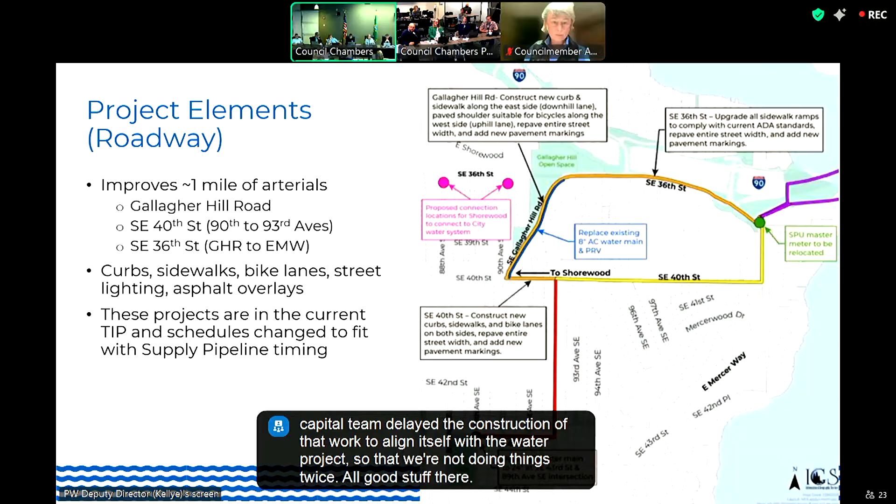So we are currently at the 60% design phase. What does that mean? The design team and construction team are at the table together working through this. We are at 60% design, finalizing those pipe alignments.

You saw in the matrix today, some of those considerations include the relationship to other utilities, the space allowance within the right-of-way, and coordination with WSDOT in terms of permit requirements. All those things are factors in those final pipe alignments.

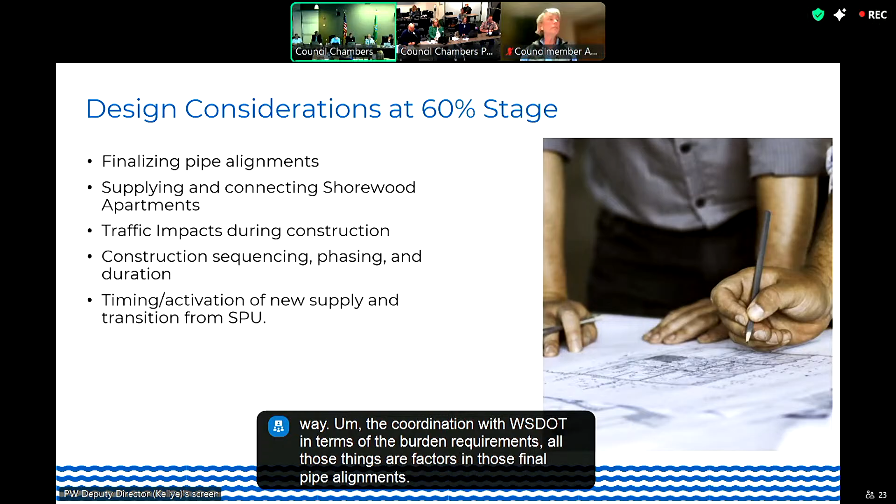We're working on finalizing those connection points to Shorewood. We'll be reaching out to Shorewood, talking through what that means in terms of the transfer. The traffic impacts are something that's being discussed heavily right now at the project team level.

There are some, I just want to be frank, staff know that that area of the island has been significantly impacted over the last couple of years with construction from the King County project and some other things. And so we're mindful of that.

We're trying to work through how we minimize those impacts because it is in the general similar vicinity. We're working through what those construction impacts look like, how we minimize them, and what we can do to not only minimize the construction impacts, but also improve our cost efficiency in the construction schedule.

So we'll come back to you all with more information on that. We'll be working with the utility board in terms of those impacts along the way, but it's something that's being discussed heavily at the construction project management team level.

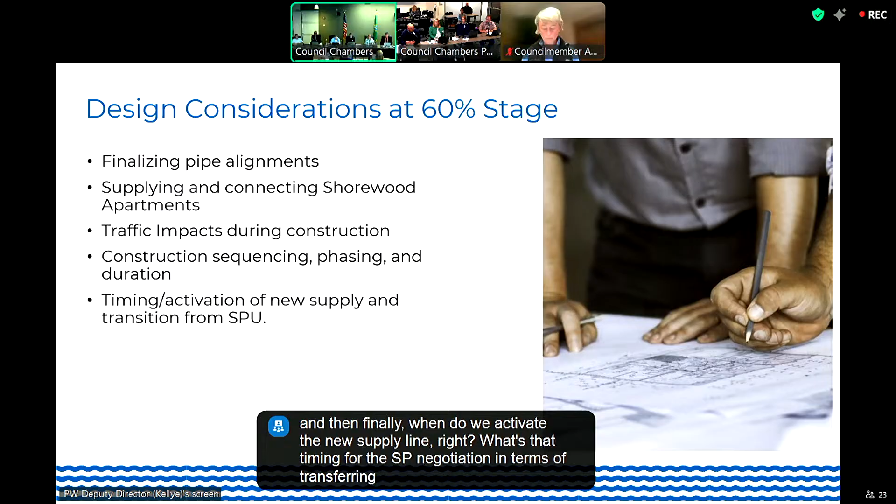And then finally, when do we activate the new supply line? What's that timing for the SPU negotiation in terms of transferring the assets? When do we actually transfer the water coming over? And then what's the financial impact of those asset transfers, the contract impact? Those will be something that'll be coming back next year to the council for discussion.

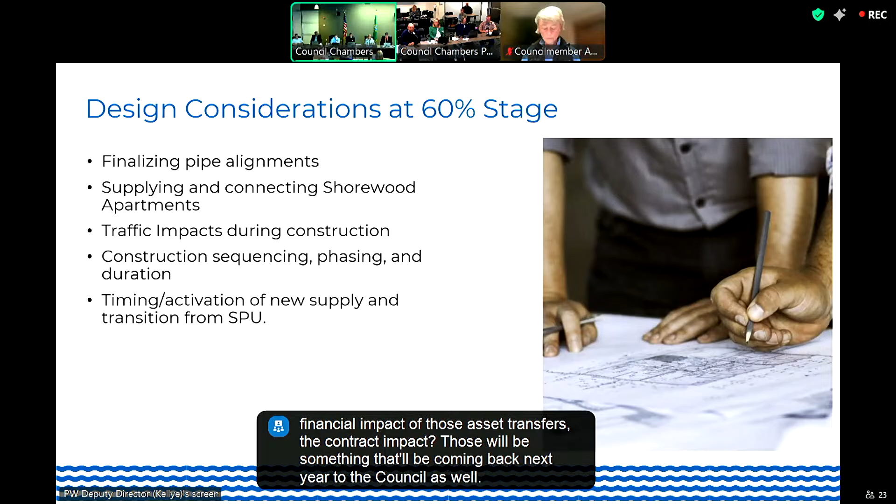This next slide, here's our time frame. We are currently finishing up the design work. We anticipate being complete in February of 2026, which is not very far away.

Halloween is just around the corner. In case you haven't gotten your thrift shop attire, or your Halloween attire, make sure you get to the thrift shop.

We look to have the water improvements constructed from February of 2026 to April of 2027. It's a little bit of a longer lead time, and that's because we're going to try and minimize our impact to school traffic and the school schedule.

So we'll try and do the bulk of the work in the summer months that have the least impact to those schools. Same thing when we get to the roadway improvements. So again, a little bit longer time frame for construction than perhaps you might see, but it's phased to align with minimizing those impacts to the school and the traffic volumes in that corridor.

And then we look to be substantially complete by December of 2027. So moving right along, next slide.

Cost estimate. So you saw on the agenda bill, at this 60% phase our estimated water cost is 12.5 to 13.5 million. I say the water cost because the PED improvements, the road improvements, are still being fine-tuned. Some other things are still in place. So this is just an early estimate at 60% design.

The engineer estimate will be further refined as we go along, and that'll be provided to council as an update in our Q1 2026 update. But right now we're at 12.5 to 13.5 for the water portion of this project. That includes both the supply line as well as the AC main replacement. So again, there are two projects wrapped into one there.

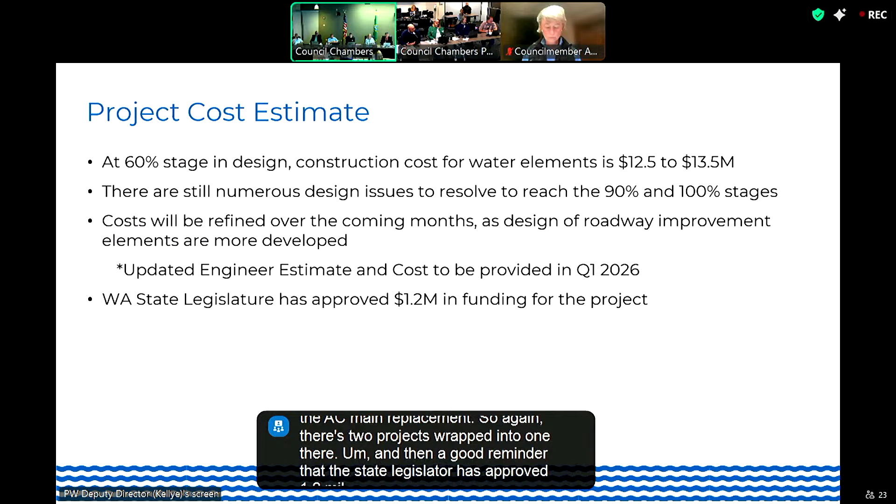And then a good reminder that the state legislature has approved 1.2 million in outside funding for this project. So great news for us in that.

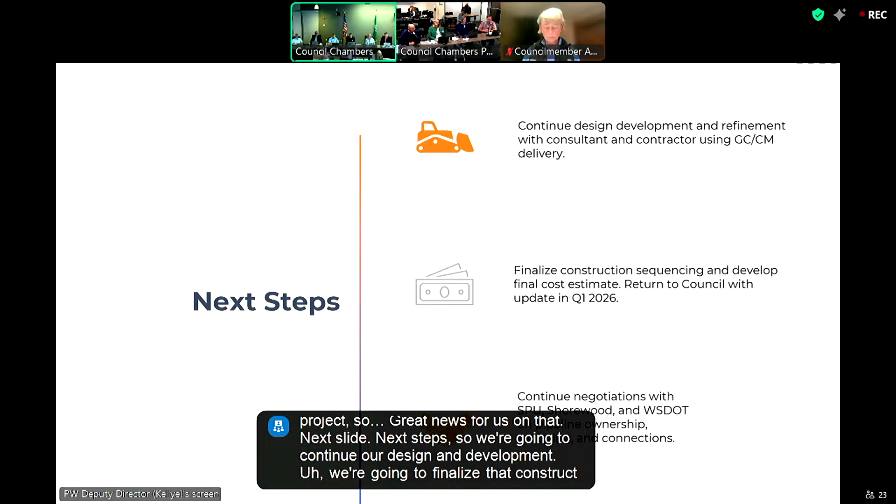Next slide, next steps. So we're going to continue our design and development. We're going to finalize that construction sequencing. We're going to work with the utility board along the way. I will be back to council in Q1 2026 with an update.

And then we're in ongoing contract negotiations with SPU regarding the transfer of the assets and that timing of when water is turned from their system to our system along the way, and working with Shorewood as well. Next slide.

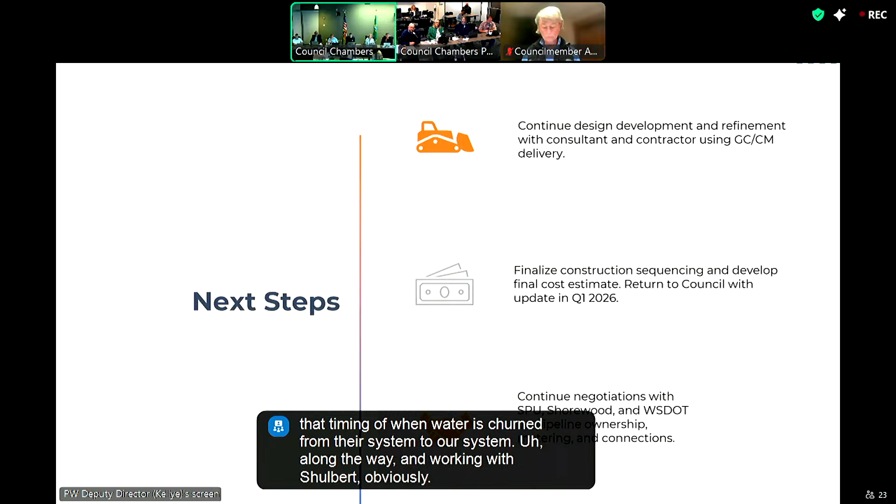Questions? Okay, Councilman Reynolds. Very impressive presentation. One thing that was particularly noteworthy to me was the success your team has had with getting grant money. Can you just kind of educate us a little bit on what that process is like?

Do you have a dedicated grant writer on staff? Is it just the duty shared among the staff? How does it work? I will say, Kellye and Shelby can help me answer.

I will say our really good grant writer was Paul West, and he retired earlier this year. So we are looking to fill that void. But in short, it's a hat that's worn by multiple people, and it's actually shared across the organization. A lot of times grants will come up out of the city manager's office, the finance office, and they're sharing information with us. Hey, you should look at this, right?

And so it's that constant communication and collaboration across the departments to identify those different grant sources. Sometimes they find things that we don't know about. But in terms of the actual application, it's shared by many different people. Some of us have a really strong knowledge base about the specific project, and some people are better writers, and some people are better presenters. So we sort of share those duties and figure out what the best path forward is and identify who can participate. It's certainly a process, and there's no perfect scenario how it works out, but the team is really good at it.

So it's always struck me as it's a skill, right? Yes, people have to learn. Would it be worth considering adding a full-time professional who does only that, who's specialized, like a position for itself?